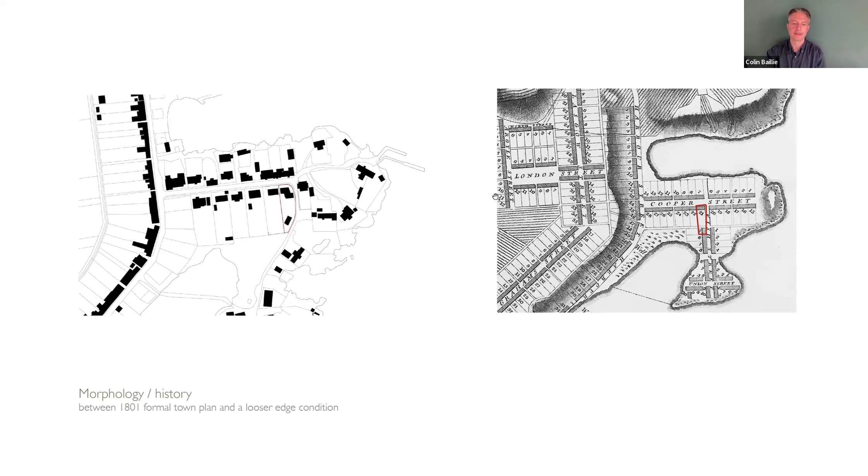Which is very much reflected today. Harbour Street has this very polite language of dormers and orderly fronts, but around the peripheries where our site sits, it quite quickly starts to break down into some really quite informal and characterful smaller buildings, made in a less precious way with corrugated materials, and less direct frontality in how they're composed.

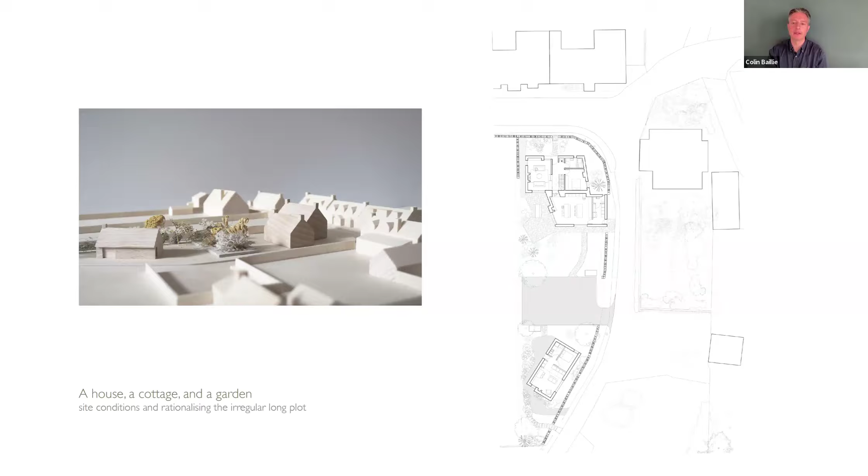I think simplicity is a real ethos within the practice, and sometimes it takes a while to get there. When we first started looking at the project, the context and the site, we probably started from a place that was maybe looking a bit more adventurously around aspects like form and the sculptural object.

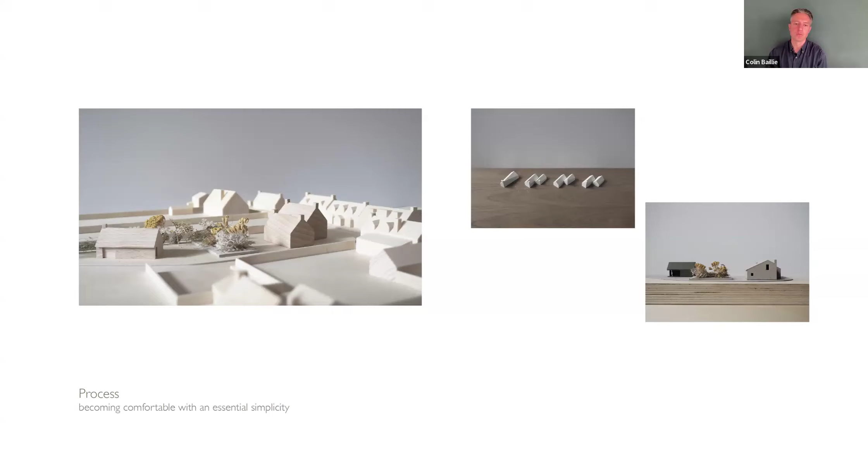Like we do with a lot of our projects, we gradually started to let more and more of that go and pare it back to something we could become quite comfortable with just being formally simple, really engaging with how the building's put together and the character within those quite simple rules. So the process was really one of paring back.

As you saw in the plan, it's quite an unusual shape. It doesn't quite fit into the original town plan, where with these very geometric, rectilinear plots, it has this curved edge. So the buildings are situated to reflect that and address streets, but also acknowledging that fronts and backs are quite prominent.

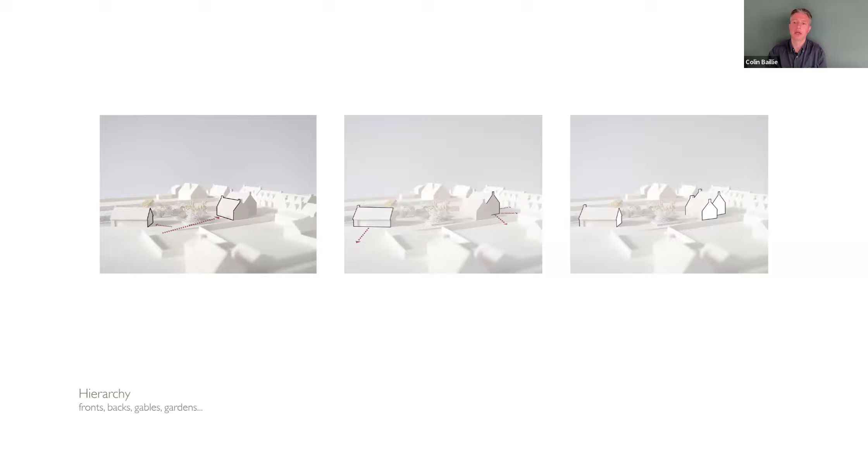We're dealing with a corner, we're dealing with these kind of longer vistas. The very first image I showed, from the other side of the loch, the position of Iorram is really quite visible and legible. So it's addressing this variety of conditions within the plot.

And I guess the context of the village is particularly important as well, that all of the buildings are grounded, have an immediate surrounding with quite a rich language of gardens and stone boundary walls and hedges. So that was really quite a fundamental part of the design process.

So Iorram sits within this triangular part of the lower portion of the plot. The building is orientated east, southeast towards the view and reflecting the angle of the street. And while it sits, by necessity, occupying this central position within quite a small plot, we wanted to use the landscape features, the stone walls.

Manipulating the levels on the plot at the southern edge to address that very narrow boundary, we created a stone wall and built up a big planting bed to create these pockets of space around the building. So while the building sits quite centrally, we've created these little gardens that each have a unique aspect defined by the building, using the edges to make those habitable and make sense around the building.

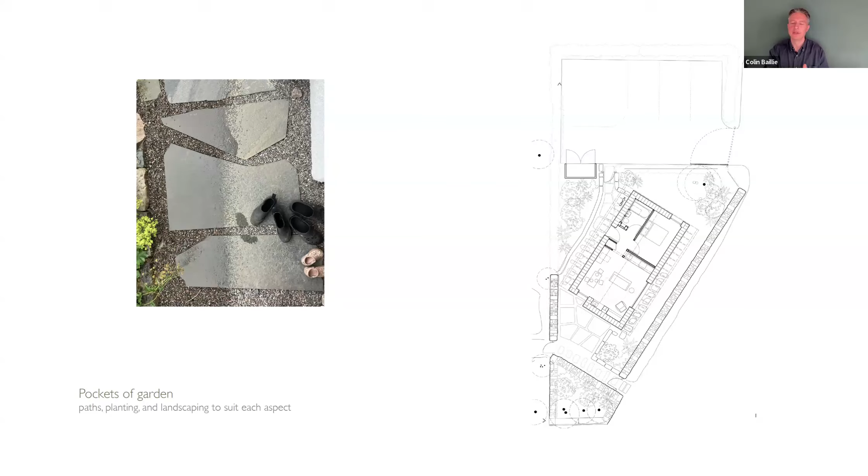Within the landscaping, there was an idea quite early on that the landscape should be something completely other from the building. So the building has this geometry and slight austerity that we observe in some of the quite hard vernacular buildings, but the landscape can belong to a different language and deliberately be quite rustic and contrasting, rooted in this idea of a cottage and its garden.

And then, as I mentioned, the long views and these vistas that you get from this shoreline as you walk along the beach, or also from boats. It's a prominent harbour throughout the summer.

So structure, language and construction, it's something we became very interested in when we were developing the project. Plockton is a conservation area, and it's quite a strict conservation area. There are not many conservation villages within the Highlands, and so one of the starting points for the project was this expectation that you have to sort of fit in.

And there is this quite maybe conservative language around conservation. I guess in a way we didn't really see that as being problematic, but we wanted to ensure that whatever we built would have a kind of authenticity with the vernacular language of the village, and not be representational of the architecture that the conservation area seeks to protect.

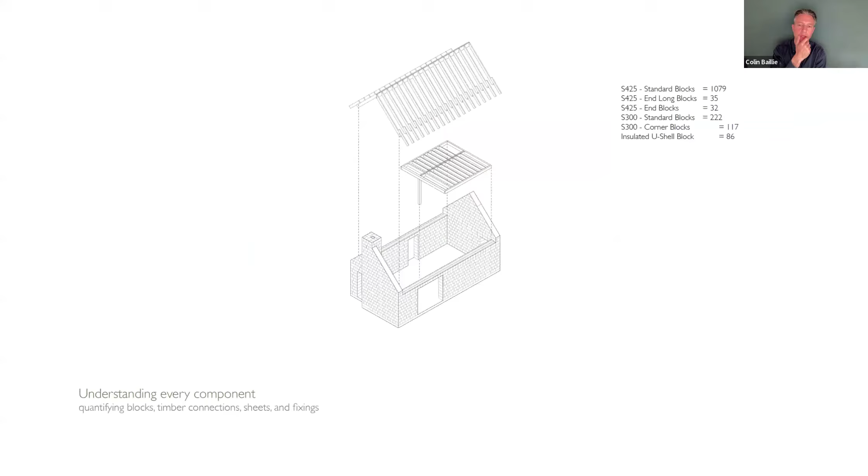Buildings change over time. I think that's part of the beauty and joy of historic buildings. One of the other things that we were really engaged with as self-builders of the project was having to take responsibility for everything within the project. So we set out every single block.

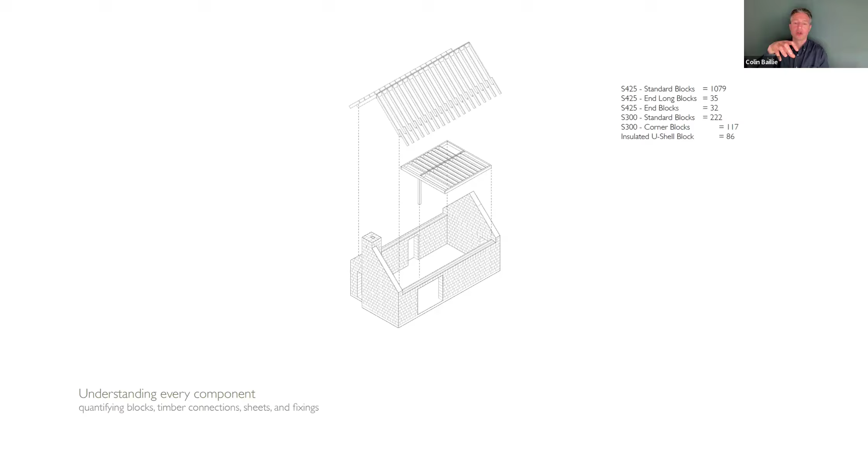We built the walls out of a load-bearing clay block system, a thermal clay block system, which effectively creates this load-bearing shell. And the timber structures were then effectively built within that. So the shell is completed in its entirety first. The majority of the scaffolding came down at that point, and then we worked from within the building and placed this roof structure and the internal walls.

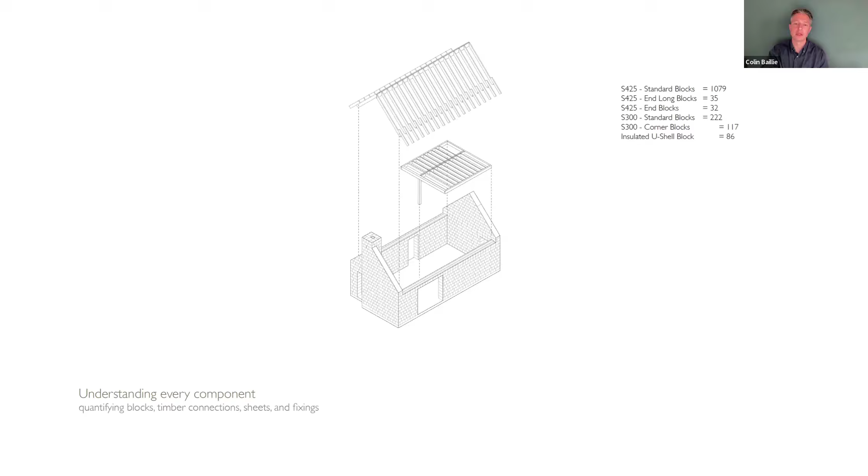I think it's also one of the nice things about working at a small scale, which this project gave us the opportunity to do, to really know the building inside out, to know every part. We ordered the fixings ourselves, we ordered all the materials ourselves. So we had to make this 3D model, in a way that would quantify and allow us to understand every single component, which was actually also a really good way to minimize waste through the construction process.

Working with natural materials inherently reduces waste, because the materials have uses beyond landfill. Obviously with timber, there are many uses for offcuts, and we managed to firstly quantify everything down to quite a fine level of accuracy, and then secondly, in the case of timber, to repurpose offcuts for joinery elements and other aspects of the interior of the project, which I'll show in a few slides.

And then with the clay block, there were no plastics, no membranes. It's a single material building product. You can see in the image on the right these cuts or offcuts from the verge, where we place this timber board and effectively just cut on an angle the excess areas of block, and they can just be crushed down. We use them as a permeable substrate to our paving.

Very, very little needed to be removed from site, which is obviously beneficial from a sustainability perspective, but also for construction logistics, where we're working in the Highlands. It's actually very hard to take things away from site, and it can become quite a challenge on larger projects.

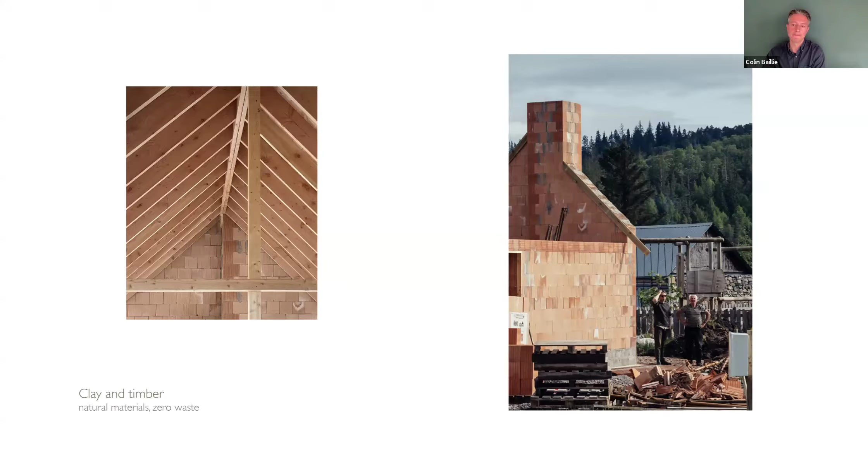So the building is effectively extremely simple. It's a clay block wall construction, a timber roof construction, timber-based wood fibre board insulation on top of the structure, and I'll show you that detail a little further into the presentation. And then for the surfaces of the walls, we used natural lime harling with quite a coarse aggregate on the outside of the building, and then on the internal faces, this is the image on the right, shows the clay base coat that we used, which was a mixture of UK sourced clay and hemp fibres.

So it provides a thick base coat that is also the parge coat for the blocks, creating the airtightness layer, again without using any membranes. And then we used that as a rough finish to take the smoother natural clay top coat. It was quite a nice moment in the project and did make us wonder whether we ought to have gone for a darker colour of plaster, because there was something quite cocooning about this rich green plaster colour.

And the hemp fibres through the clay also provide additional insulation, although we didn't factor that into our U-value calculations. It creates small air pockets within the material.

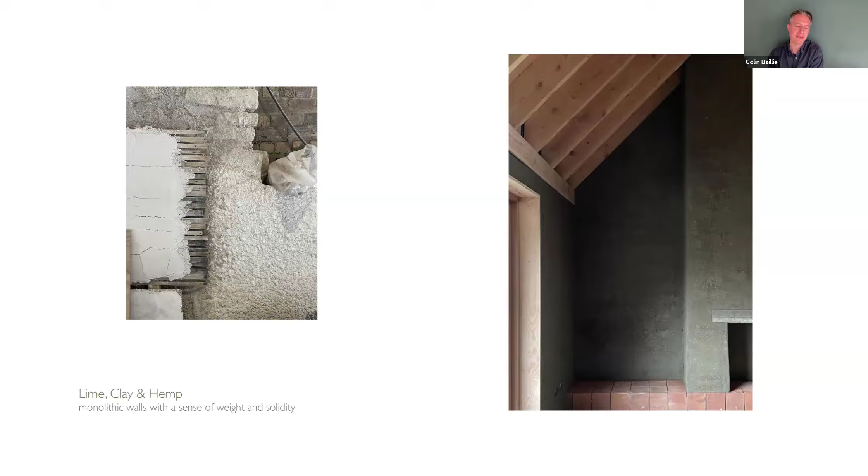The image on the left was from the Scottish Lime Centre. I did a short course at the Scottish Lime Centre on lime harling, and actually undertook all of the harling work myself on the project, which was possibly a bigger task than I initially anticipated.

With the internal walls and this external image, I think there's something that the clay, the load-bearing masonry walls provide for the building, which is a real sense of solidity and mass. Internally, there are little irregularities in the walls, where we asked the plasterer not to build out to square off edges, but to actually follow the contours of the block. So there's quite a subtle natural undulation to the walls that wouldn't be registered with a sheet material. Everything would be made a lot more crisp and rectilinear.

So while the load-bearing elements are effectively finished over, I feel there's quite a strong legibility of this load-bearing shell. Apart from anything else, there are no movement joints, no weak points in the construction, so it does have this sort of mass and solidity that a historic masonry building has.

And then against that mass, we enjoyed exploring the thinness of corrugated metal as a material. So pushing this chimney back to align with the ridge creates a real sense of weight in that gable, which faces into the prevailing weather. But we tried to expose the edge of the roof in its millimetre thinness as this kind of blade-like element that sits atop the much heavier load-bearing construction.

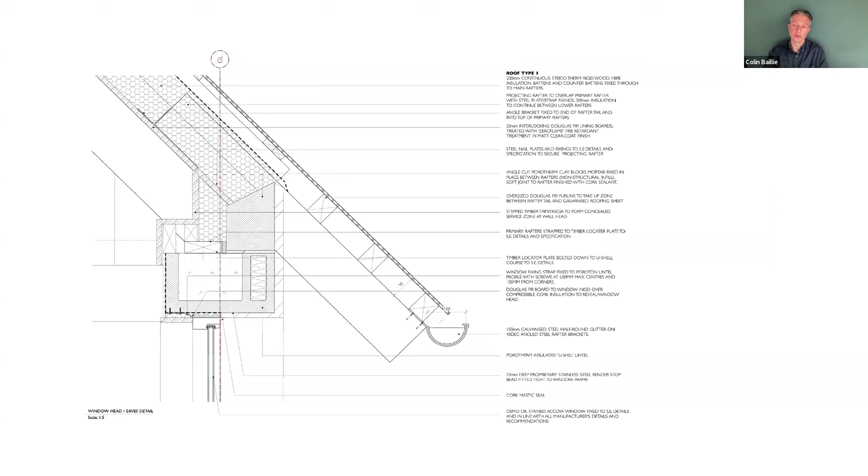On the internal leaf, we created a service zone with how the rafters come down and sit onto the wall head and the lintels. So we were able to run services down across the eaves, and then through the clay block, the conduit is just raggled in. It's very similar to a historic building.

On offcuts and waste, we made the internal doors. These are just a couple of images from on site. We made the internal doors from planed down offcuts of joists, using traditional methods of craftsmanship. The kitchen itself was made also with offcuts, and it was important for us to take that use of the material right through the carpentry elements as well, and not just make Douglas fir doors on plywood carcasses. We wanted to make this like a piece of furniture, so the whole thing was made as a bench and set into the space. The insides of the cupboards and everything are made out of jointed Douglas fir boards.

In terms of the organisation and the character of the building, we are working with a very small amount of space. The plan is only 38 metres squared, and I think one of the things we wanted to achieve with how the building feels is to try and bring a sense of generosity to that quite small footprint. So while the plan is essentially quite simple, there are several little devices that we employed to try and give the interior a sense of richness and space.

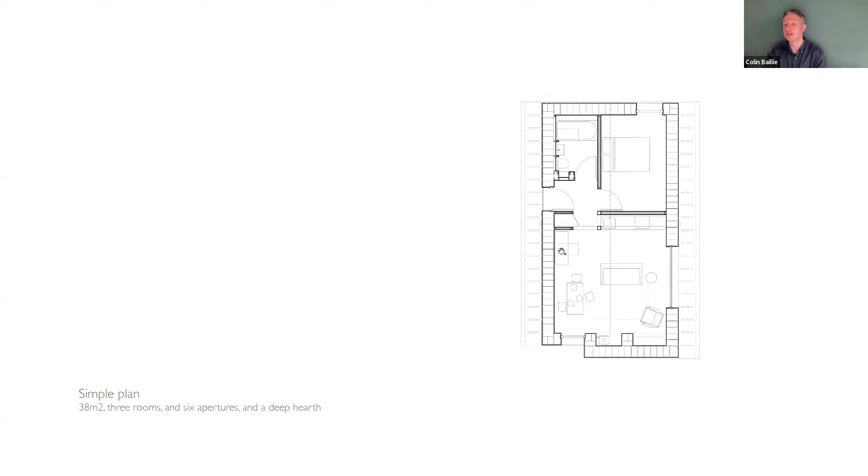Spatially, we have created some spaces with a kind of joist ceiling. So there's a little attic space above the bedroom and the entry hall and part of the bathroom, where we were quite keen to ensure there was a view right through the building and out. So there's that sense of volume, but also compression within the spaces.

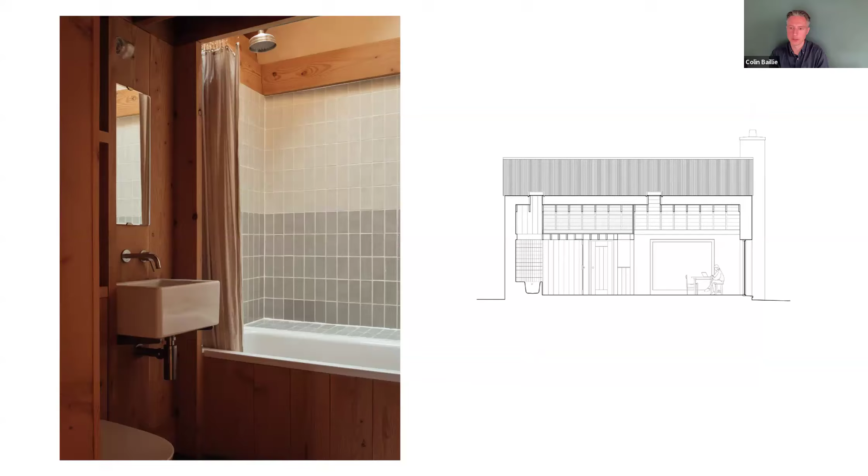And then the long section shows how the roof lights are placed, which is a detail that's quite hard to photograph within the close quarters of the building. But we used almost a conservation-type steel framed roof light, which sits on top of the rafters and insulation zone so that you don't read any frame at all from the inside of the building.

We set the rafters out very carefully around the dimensions of the roof light, so we could achieve an even spacing across the section of the building and have these roof lights exactly where we wanted them to be placed, to illuminate and enliven the section.

On the left towards the north gable, that kind of view through the building into this panelled-in bath, which then has a little double height space above it and is completely top lit, with a sort of frameless roof light that marries up exactly to the rafters. I think that's something we thought was quite successful.

It feels like it gives a very simple plan a sort of spatial richness and elevates it. The principal volume gets the full height of the structure, and you can see it in the top left, the roof light, which sits above the insulation zone and exactly on top of the rafter.

In the centre of the plan as well, there's this quite chunky column which anchors the kitchen, and a big deep beam that runs right across, which was 200mm wide and about 250 to 300mm deep. So a really big chunky section that we brought in on its end through the door, and managed to carefully place that up on the ring beam. And the roof light detail I mentioned.